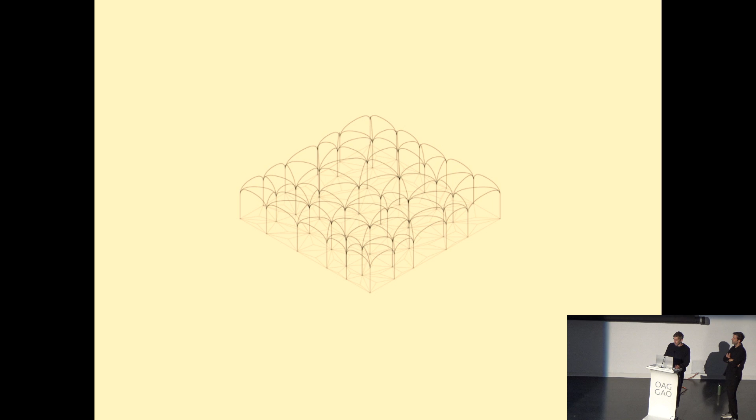It was really a very intuitive play with forms, and we generated nine different forms - I'll go through these quickly since there are tons of images and diagrams of geometry. You can see it's very abstract, often about geometry, form, repetition, and systems, but it always looks like architecture. You can recognize that it's holding up, that there's structure, rhythm, cells, and exploration of different types of structures. We did a series of booklets and exhibitions - it was really a project that occupied a lot of our first years.

In the meantime, we also were interested to build, not being only in the realms of concept, but to look at the complete opposite side, having clients, budget, context, and operating in the actual built context of Montreal. Because when you're a young architect, most of the time you don't even get to build a new house. You get to swap the kitchen for the bathroom, or just do a roof access.

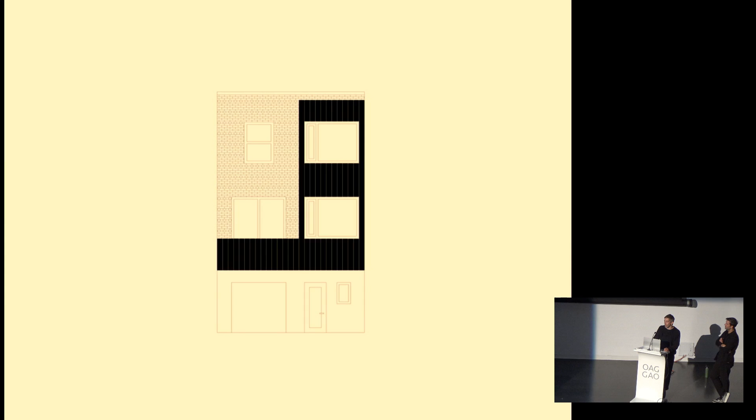Some of them were more successful, some were, when we look back, a little less enmeshed than what we'd like, or what maybe we're able to do today. But we did a lot of them, and I think it was a really interesting way to understand how to confront these idealistic concepts, working with very simple geometric forms against the actual complexity of the site.

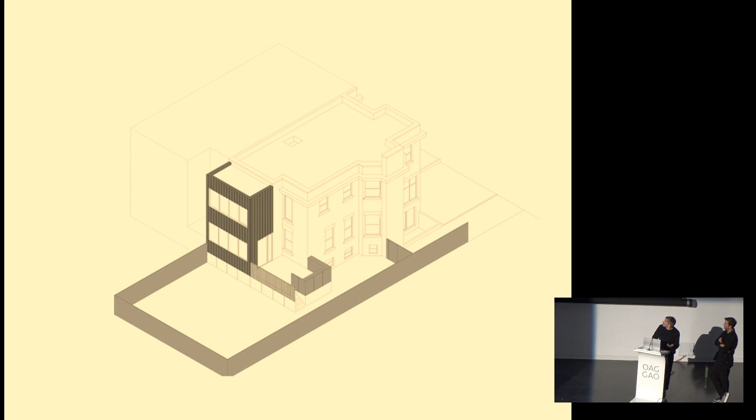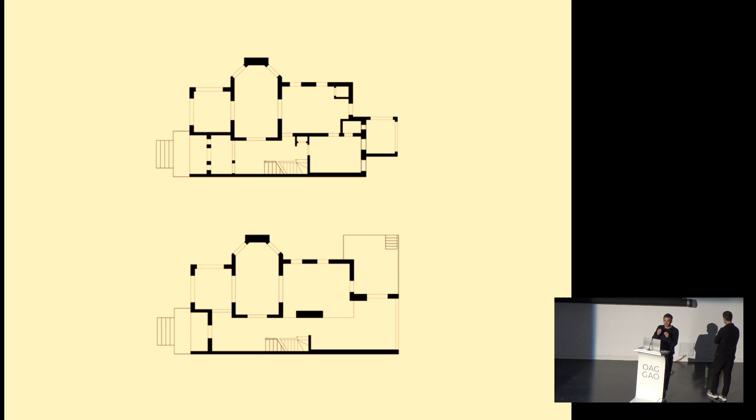For some of them I put plans because, in the end, the more we advanced, the more these pure boxes—really a family of small articulated boxes—started to get enmeshed, retaining their formal rigor but starting to really weave a relationship with the host.

Like in this project, for instance, we tried to align the windows and take some cues about the chromatic palette of the house. So experimenting with these relationships, the box with the landscape, or some kind of materiality.

So we were doing both these projects in variation and all these addition projects, dreaming of having this open field in front of us to do the absolute concepts we imagined, but also confronting this reality. I think we learned a lot about this confrontation with context.

So we recently went through the process of rebuilding our website, and it forced us to revisit our portfolio and take the time to better define our work and attitude towards building. This notion of the project existing within the tension between the autonomous concepts of architecture and the specificities of the program and the site was really a fundamental aspect to this exercise.

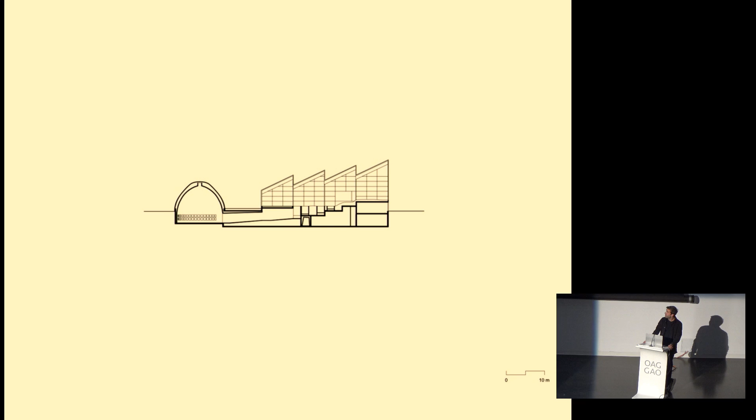It's entirely opaque and dense, a very organic form, unlike the greenhouse, which is a very technical and pragmatic form. So in the site, we wanted essentially the building to kind of disappear, but also be extremely clear.

Bold in its intent. So this is a section where we showed the sloping greenhouses, the dome, which is also a vegetated dome, essentially completely wrapped in a metal mesh, and over the years will start growing and becoming almost this kind of chia pet.

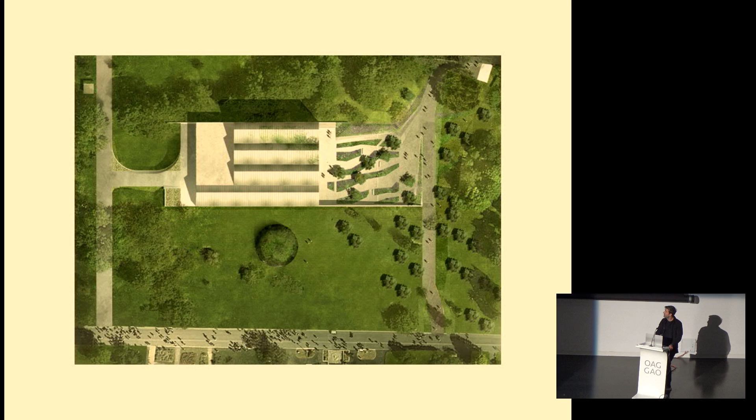We enter the museum by gradually sloping down this butterfly garden that we proposed, essentially dug into the botanical garden site, sloping down about 5 meters. The botanical garden is extremely flat, and this creates this kind of first reset where we suddenly lose contact with the horizon and become more in touch with the facades of the building.

Also note that in the sequence, the entrance to the insectarium happens here, not inside the building. The exhibition, the butterflies, depending on the season, and even the animators can be outside and greet you outside. This is also where you end your museum visit.

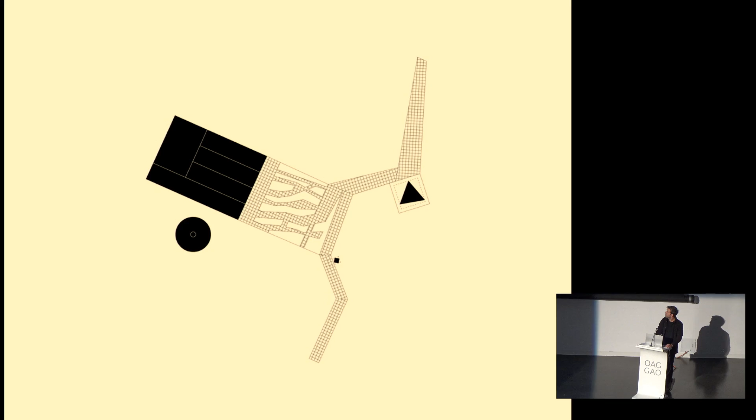And the idea for this pavilion was to create a pavilion that wasn't static, that allowed us to really move freely and guide us through the different institutions of the botanical garden. And we quickly identified the triangle, the equilateral triangle, as a form that had these qualities of being both very frontal, but also less static, than a square, for example.

So by positioning it the way we did, it allowed to be at once addressing the entrance to the botanical garden and the entrance to the insectarium, but as well the exit, because the flows of people were extremely complex in this area, because some people started their visit at one end of the botanical garden and ended it at another end. So the idea was to create something where we could naturally flow in and out of the pavilion and have it feel less like a building and more just like a hub or this kind of meeting spot.

And then we worked with a square overhanging roof to create this essentially framework for the triangle to really express itself, which also created these gathering spaces that were protected from the rain and from the snow, but essentially that really allowed to recognize the triangle as a shape.

So we can see here in plan, and inside the triangle we worked with 3 other little triangles to really define the corners and express the geometry, the pure geometry.

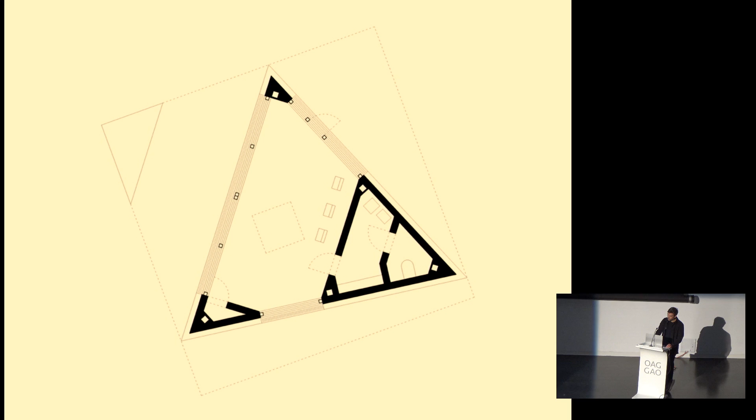The other question that we were really interested in for the pavilion at the Botanical Garden was the question of the role of the pavilion and the typology of the pavilion historically. And we were very interested in different representations of these 18th century and 19th century ruin-like pavilions to understand the relationship between nature and architecture, almost in this very romantic way. And we wanted the pavilion to be less of a building and, again, more of a shelter or a meeting point and a threshold.

The other idea that we looked at was the idea of materiality. And we quickly identified corten as this unique material that allowed the building to not be static, and to be more at one with nature and with its context, to change, to evolve.

But then we also wondered, how can we modify this material so that it's even less static, even less clear? What's interesting with corten is that it very slowly changes through the oxidization process, but it also changes with the climate, the light, and the adjacent vegetation, which can have an impact on it.

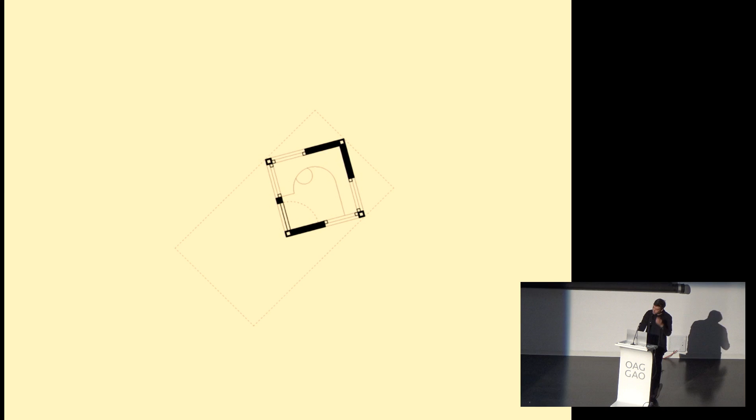So we are interested in many programs. I think we really are architects that don't want to specialize, that are actually worried about the idea that we would become specialists of any typology. When we did the insectarium, there was one magical opportunity: there was no precedent for an insectarium. I think it was really interesting, this idea that you don't have a clue what an insectarium should look like, how it's built, how it's supposed to be. So you're really left thinking first principles, and I think that's what we tried to do with the insectarium. I think you lose this when you do program after program, the same typology. The naivety of doing things for the first time is always really good. So we have a very large array of programs we are tackling, and this is something we really like.

So there was this opportunity in Quebec a few years ago. Schools were done by the same four or five firms, because every time there was a school going for bid, you had to show how many schools you'd already built, two or three, and this kind of protected gateway to public commission was really problematic.

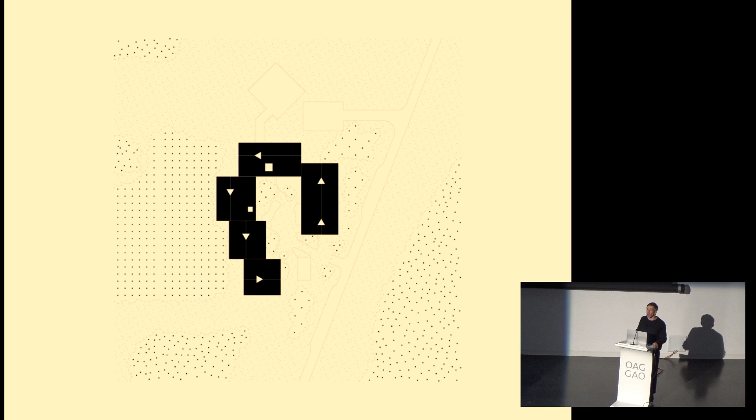This is what you see in this diagram. There's a series of pavilions, going counterclockwise from the right. There is really the small kids pavilion with the kindergarten and first cycle. Then there is a common pavilion on top with the cafeteria, the large area where the groups can be addressed, and the school administration. Then the third pavilion counterclockwise is the gymnasium, and then cycles 2 and 3.

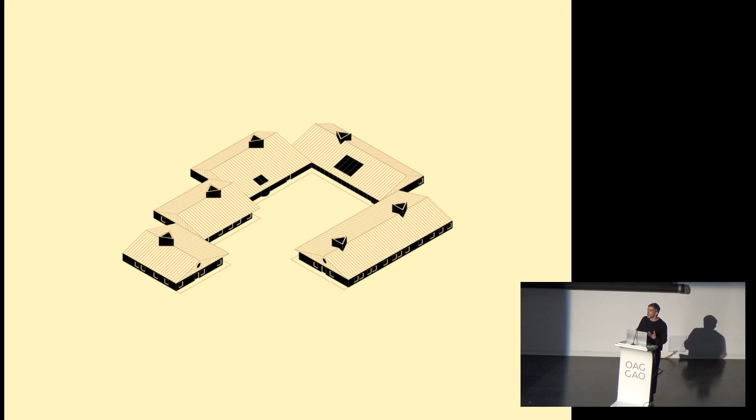We've organized these functions in a kind of group form, but at the same time, just like the insectarium where we had this kind of heterogeneous program, it was important for us to group them in a formal system that would not make just a collection of objects, but a variation on one theme. So the form is very articulated, but it's also a repetition of the same kind of form, something we had explored a few years prior.

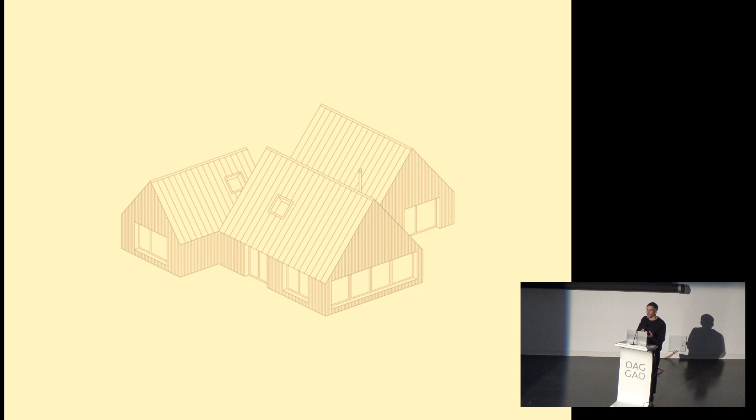With this small house out in the country, the brief was about families that were recomposed, so there was the house of the kids, the house of the parents, and the common house. The brief was really interesting in the sense that there was 3 houses, so we literally did 3 houses, but again it was the same form, same proportions, articulated, rotated, expressed in space, creating this kind of complex organization internally, but still creating this coherence that is really important for us.

So you see a little bit what I've talked about. Even if the gym is something completely different in terms of height and scale, it has more or less the same expression as the other pavilions, and we achieve that by sinking the gym one floor down.

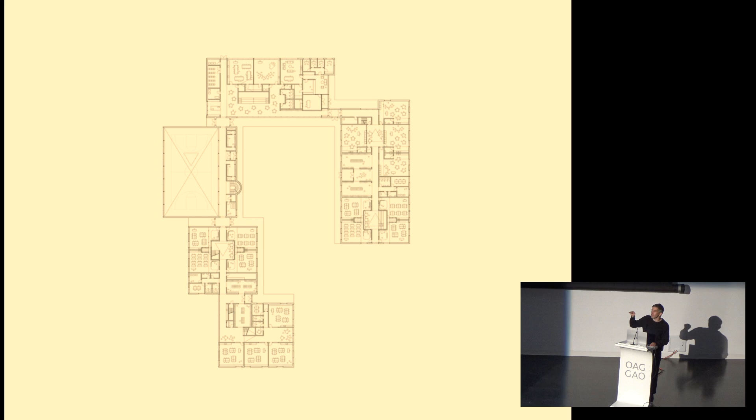So when the kids cross the gym to go to the cafeteria, for instance, that is on top, they can see the other kids play one story below. Just this move was allowing us to keep this uniformity, this kind of horizontality that you see there. So the gym is not 2 floors while the rest is 1 floor.

I think this is an important thing, where the relationship with the program is used to articulate and generate the rules of the organization of the school. But at the same time, the formal system is also very important to keep coherent, and in that way, the sinking of the gym was a really important gesture for us.

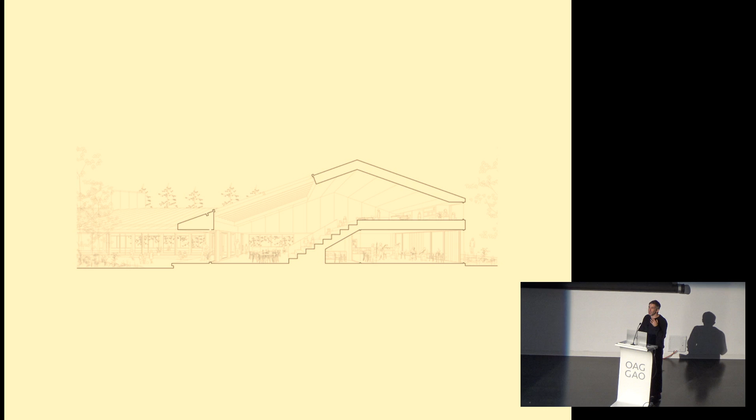So you see some of the sections we did at the time of the competition, trying to use this space, because in terms of context, there was a lot of agrarian building, pitch roof building, large kind of agrarian buildings in the area. So we also worked with this idea of the archetype.

That's another constant in our work, and the question then was how we can use the archetype of the pitch roof, how we can use it spatially, as we'll see in a few moments in the image. Very beautiful context with Mont Shepherd - and I didn't say it when we had the plan - but basically the courtyard is opened, exactly calibrated to frame the top of the Mount Shepherd from the courtyard. So it becomes part of the architecture that is outside, looking for parameters to organize this courtyard. The view was one that regulated the formal system.

So this is the entrance, and you will see these kind of large chimneys that are also a reference to vernacular buildings around. But these are light wells that bring light into each group of 4 classrooms.

We'll see the interior - this is a very low building. The context was very horizontal outside the Mount Shepherd, which is kind of an accident in the landscape. Everything around is very, very flat, very horizontal. So we thought the building should just hang low in the landscape and let the mountain express itself as much as we can.

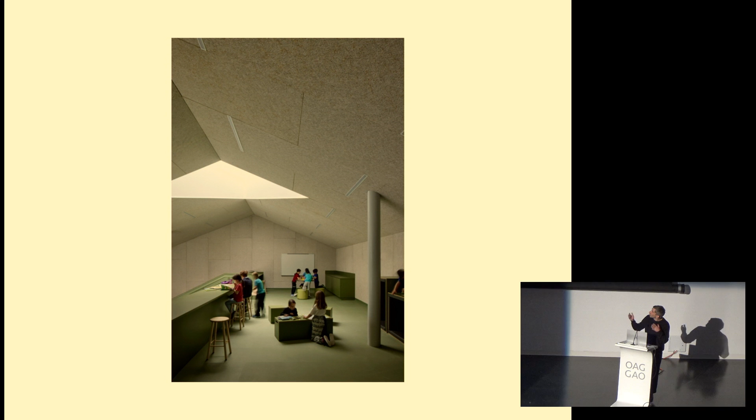So different pavilion, different kind of mezzanine, but every pavilion has a little bleacher and a mezzanine to go and read a book on a beanbag under the roof. This is the main bleacher, where all the kids gather. Again, the same kind of typology, very open onto the courtyard. You can actually open large sliding doors and go inside and outside, and on the top there is this little space.

Relationship to the forest, and the view — this is at the end of one of the mezzanines. There's this oculus on the pitched roof that frames Mount Shepherd.

Of course, we like to do museums. We like tackling different programs, but we really like the museum also as a public space and a space of reflection. So we did this competition, the last competition, and we are now doing the permanent exhibition in the building where we lost the competition, but we just thought we'd put our ego aside and do the exhibition. It was still a nice project to do, but we wanted to show you the competition entry.

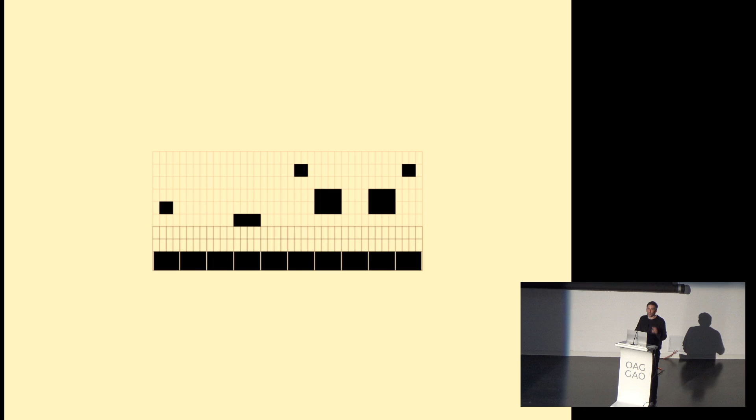It was an open competition, first phase international open competition, with 4 finalists. Again, we were trying to find what was the figure that would be instantly recognizable, I wouldn't say a symbol, but a form for the museum. We wanted to anchor this in one programmatic element, and that is the garden.

There was one element of the program that was really important in the brief: it was going to be a garden. I think in the brief it was intended as a garden that you access after entering the building and having your ticket paid, more like a controlled private garden. But we thought it would be really interesting to actually put it in relationship to the city, as a shared space.

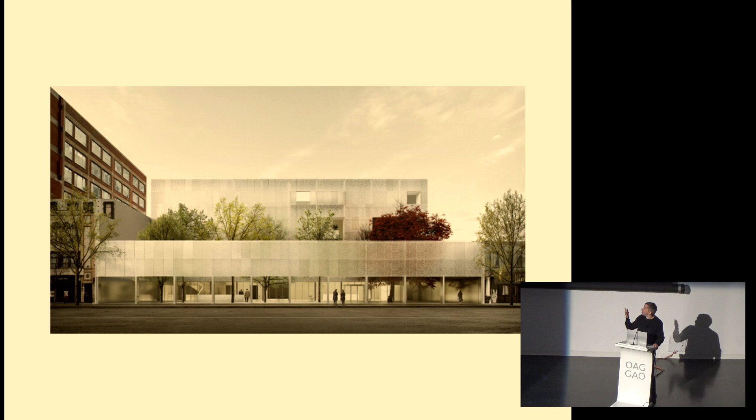So the front of the museum would be this gift to the city, or this place where communities can meet, and have people who are totally uninterested in visiting the Holocaust Museum still come to spend time in the garden or grab a coffee. And hopefully there would be meetings and encounters, or celebrations from the Jewish community using this garden, but in a much more public way.

So we wanted to both address the street and take a step back for the museum, creating this buffer space between the city, the street, the sidewalk, and the museum. And we had this whole idea of thresholds, because going to see an exhibition on the Holocaust, you need to pass some threshold and prepare yourself for what you're going to see. We really saw this as a series of thresholds that you were crossing.

So it was calling for a series of screens. I'll talk about the materiality a little later, but you see it in sections - it wasn't really an articulated form. It was really the figures of the screen, the flat 2D screens and thresholds that you cross to get into the exhibition. So you see it like from the street.

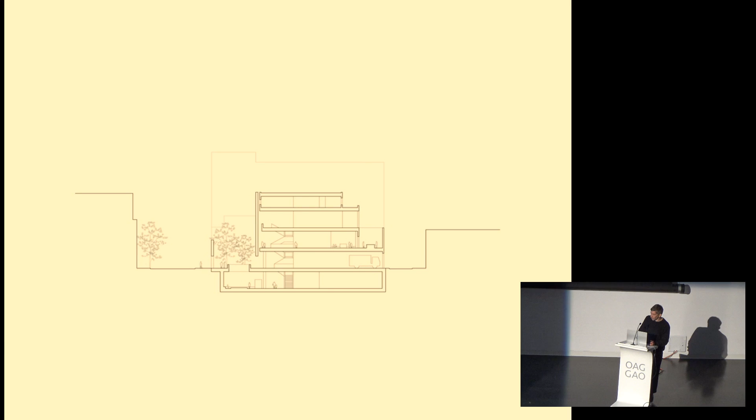There's this elevated part of the facade that is as high as the buildings on each side, which are 2-story buildings - and there used to be 2-story buildings there. So there was a relationship with the context, and then set back behind this kind of green screen of greenery participating in this layering, you would have the screen of the building. So you see in context this idea that we shifted the museum back, not putting it in front as an imposing, strong monumental statement on the street, but with a little setback.

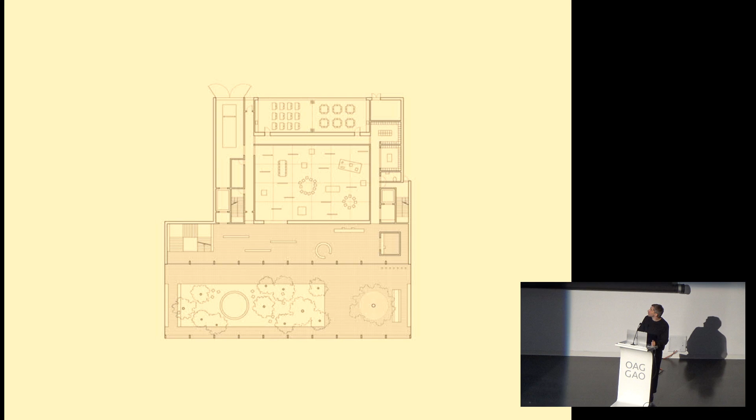So you see the garden, the hall, and then the exhibition space behind. This is really a project that is layered from the front to the back.

And when we're talking about this screen, we were interested in creating a kind of intentionality with it, because they would be so minimal that they had to add this kind of intense materiality to create something interesting in the city, playing with light. And we looked at this memorial from Louis Kahn, an unbuilt memorial for the 6 million murdered Jews.

It was like a series of spaces created with glass blocks. And he had this whole discussion about light - not using heavy concrete, for instance, to symbolize the weight of history, but creating an interplay of light and shadow, because you can always see this event as a relationship between light and dark, hope and despair. So it was a really important precedent.

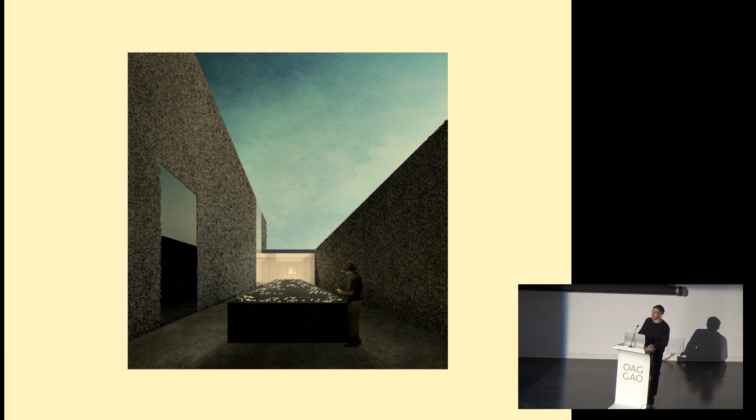And so we have this plane, as we talked about earlier, as this buffer zone between the exhibition space and the exterior, and the memorial garden in the back. So again, in this section, there is this long monolith onto which you put a stone before leaving the exhibition.

Another project that we recently won two years ago following an international competition in Montreal, called PHI Contemporary. There's an existing institution in Montreal called PHI Center, which launched this competition to bring together in one place all the diffusion spaces, the exhibition spaces and presentation spaces related to PHI.

So both visual arts, but also music and performance art. What was extremely particular about this brief in this competition was the extremely complex site and existing buildings on the site.

It's in Old Montreal, essentially located in one of the oldest first settlements of the city, at the intersection of Rue Saint-Paul and Rue Bonsecours, next to La Chapelle Bon Secours et le Marché Bon Secours. The little house we see on the right is located exactly on the footprint of the first house that was built in Montreal.

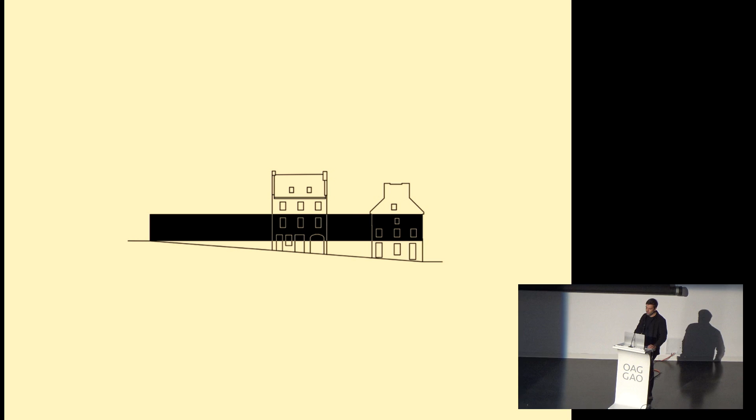And so we can see here this horizontal band and how it comes together in built form. The idea here was to really create this plateau, this new plane that served both as a reference point for the museum. It contained the art spaces, but it also offered a very unique reading of the existing structures - again not trying to add to them, but really trying to frame them and hold them together, by adding also a series of public spaces.

So here we can see on the left, we're at grade with the streets, whereas the plateau kind of hovers above the street level and creates this new entrance along Rue Bonsecours.

We can also see that on top of the plateau, there's a vegetated garden space where the public is invited to come, whether it be through the museum or independently, within the framework of the museum hours and programming. So there was also this idea of the vitrine.

How can we create something that's in a way almost a vitrine and a showcase of the artists, and not this precious box or piece of architecture that people go into to see another precious art piece or another artist.

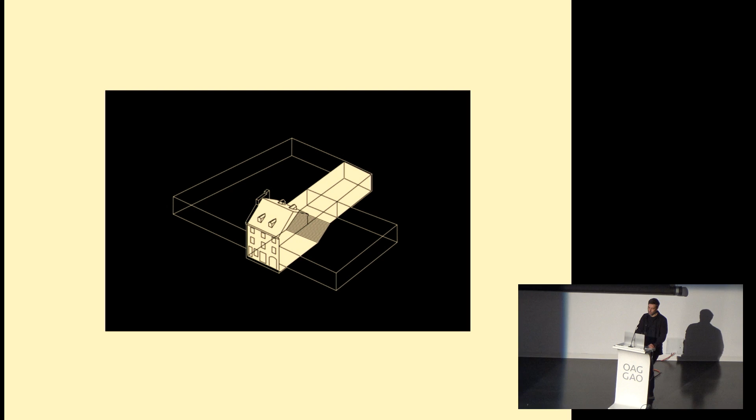They were workshops, stables for a long time, back of houses for shops and for houses, carriage houses, and they evolved and changed. Even sometimes they were used by the neighboring buildings and not by the buildings on our site. And so these rear courtyards were extremely important, and we wanted to create this almost—I'm going to go to this side.

This almost undifferentiated parcours through the site, which echoed this history of these rear courtyards and annex buildings. So again, Hubert used the word earlier, extremely complex, and we see this as being a very positive thing.

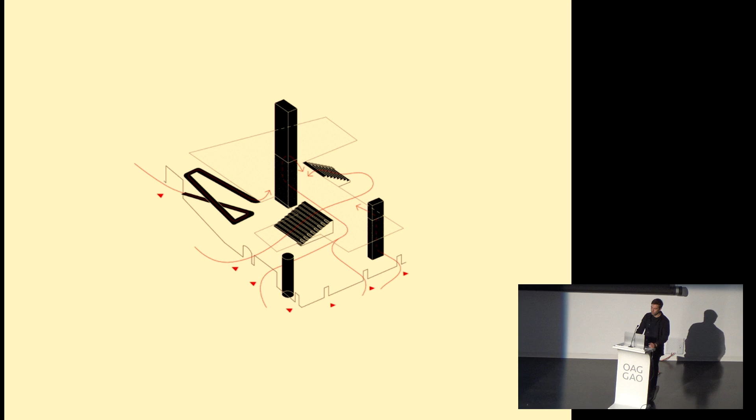To have these surprising, often somewhat confusing, but full of variety and full of personality projects that essentially can't be summed up by one thing, but also which can be read in a very coherent and homogeneous way, and can be understood in an abstract way with often this single gesture.

So here we see somewhat of an impossible view from the back end of the site, where we show kind of all the features, where we can see the courtyard, the existing courtyard on the bottom with the art piece.

We can see the auditorium, which also acts, when it's not used in auditorium setting, as a gathering space, but also a circulation space, the education space adjacent to it, and the direct access to the rooftop terrace.

And then back into the building through this greenhouse structure above one of the existing buildings whose roof had been destroyed maybe 50 years ago, and which we're proposing to rebuild as more of a mono-pitched, or single-pitched, greenhouse structure.

The project is very much in motion, and we're deep in the planning phase right now, starting to move towards permitting. So a lot of this has already evolved, but the main aspects of the project are still very much intact.

So the plateau—this is extremely important in our approach—is to really believe in these strong concepts, and to really push their feasibility in a way, and to go to the kind of extreme.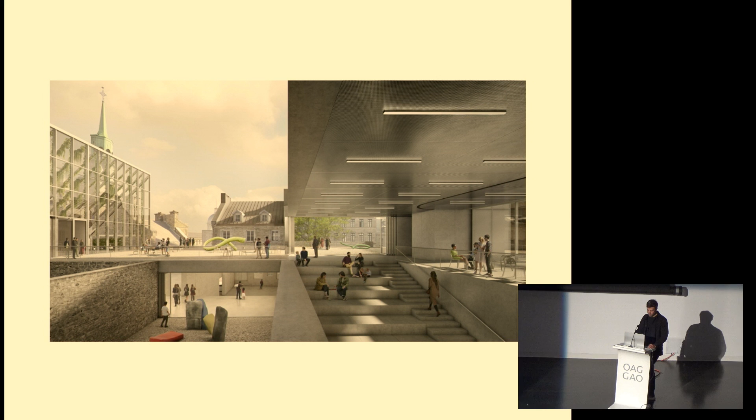But also a great space and place for citizens to see the city in a different way.

So in this case, being almost in the roofscape of Old Montreal is a quite unique feature, especially on such an expansive terrace. And you know, I could go on, but I think we've already talked quite a bit.

A lot of work was done regarding the materiality of the project, working with natural stone and stabilized earth for the roof, and using very specific types of trees and vegetation, to arrive at this still very pure reading of the original concept as this horizontal plateau.

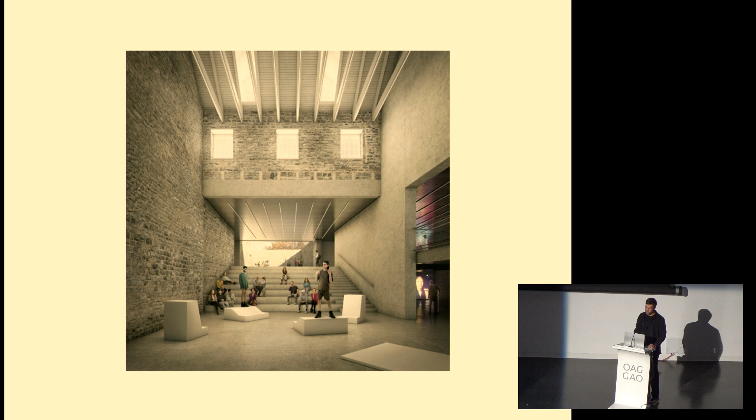Quick view inside the original house, Maison Vigée, where we can really see the connections with the existing houses on the right, and where we can see all the historical traces of the buildings and how they were transformed over time.

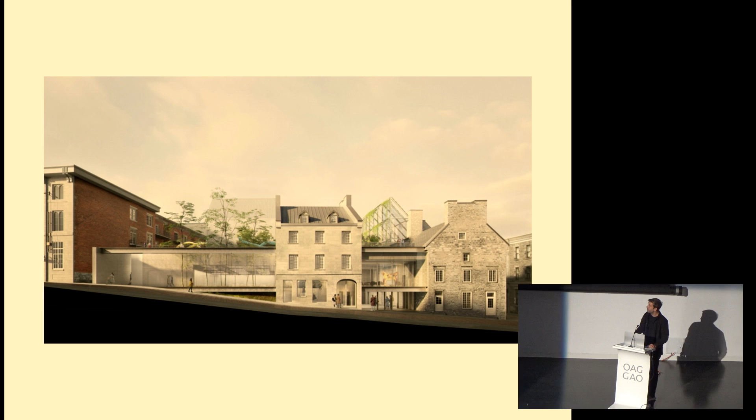Maybe just a quick note about this view that I already showed. This is the new iteration of it, which shows how similar it is, but with a few modifications, where we amplified this notion of transparency in the vitrine and this invitation inside.

One thing we want to mention about this view is that we live in a world where we are capable of doing such real representation of projects that sometimes we forget to come back to this abstract view. And while this is a very photorealistic render, this is a completely impossible view.

When we did the competition and were working with our partners, a lot of people told us it was a bad idea to show an image of a building where we're essentially a block behind the neighboring building. We're not, this is a view we will never have, but we felt it was important to keep this object-like or model-like reading of the project so we can keep using our imagination. In these lectures we don't have a chance to really dive into our work method, but this is also why we love models so much.

For this project, we worked with a physical model way before we did any renders, about 3 meters long by 2 meters wide. It was really like a train model, and this is very similar to that. It's a view where you are capable of really working together. What we like about these models is that everybody can gather around and have a discussion, and it's not just one person with the computer holding the mouse.

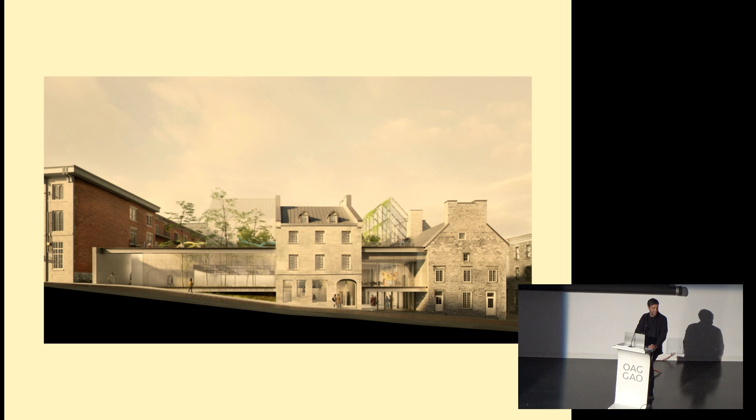Hi, Buzzy. Yeah, we've got to speed up.

Very quickly, this is a small project so we should be able to go through it fast. This is a house in the Laurentians outside Montreal, very close by. The brief was very simple: they wanted a cabin or a house, not quite a house, more of a cabin in the trees.

The land already had many mostly mid-century, but modern structures, each one very simple and yet bold and recognizable. The clients asked us to come up with a new version of these small houses on a site that was extremely pitched, over a 30 degree slope, which was perfect for a house in the trees.

We were also confronted with very specific bylaws, the main one being that we couldn't build on stilts. So how do you do a house in the trees when you can't really go up, without having a massive footprint? We worked really hard with the bylaws to come up with the most simple structure that could be easy to use and easy to live in, but which could help us live inside the trees. So what we did is we cantilevered a 9-square grid box on this very small concrete plinth.

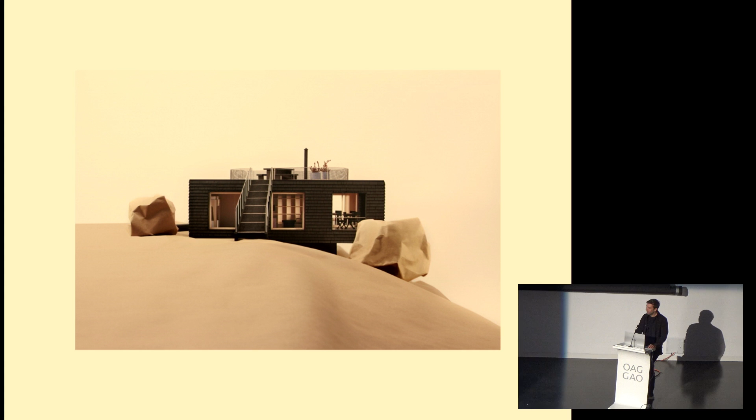Then we applied this very simple 9-square grid and regular grid of windows, 9 cells, other than the entrance side which is very opaque. I'll come back to the ramp in a second. To create a house, and as we can see in this plan, not every room deserves the same size, it was an exercise in finding the limits of where using such a rigid grid becomes more of an opportunity than a constraint.

It turned out to be quite interesting and not that hard. Everything from the terrace, the screened-in porch on the left, everything fit into the system without too much effort. So it's a three-room house, with a room in the basement.

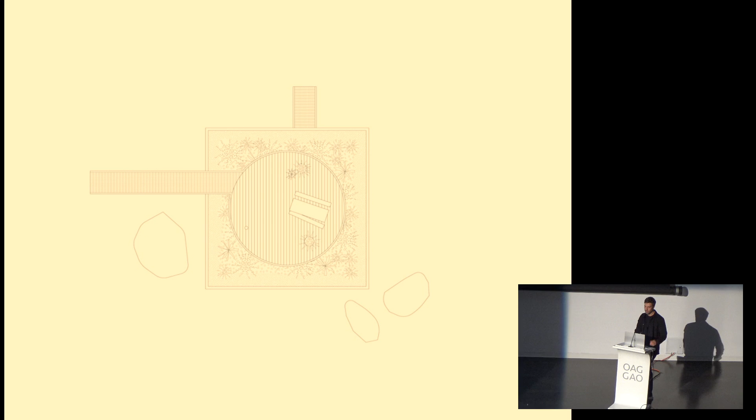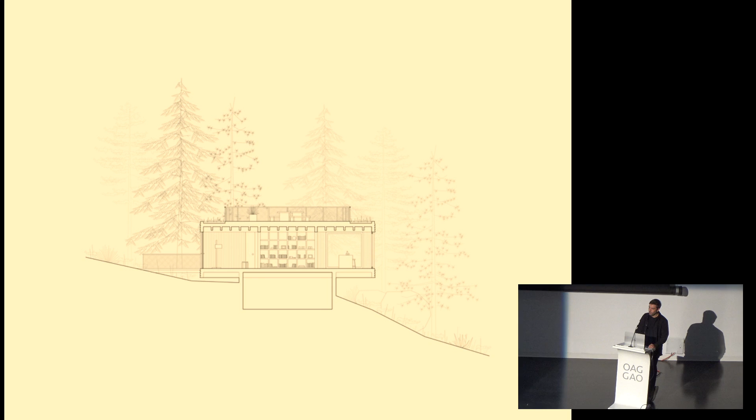And on the roof, to be even more in the trees, we're offering this large deck with a passerelle that reaches up to it, so on all 4 sides the house kind of floats in its setting. It's a similar diagram to Phi, but it's not historical buildings we're trying to frame here, it's more the nature in which the house is set.

Each side offers a very different view and angle, yet with a completely homogeneous facade system. A little glimpse of the structure, which is essentially a very simple steel structure at the plateau, then fully wood above it. We see the concrete plinth, the steel structure overhang, and above it a full wood structure, not an ounce of steel, no aluminum, nothing. It's 100% wood, mass timber, and shingles. So again, pushing this idea of going all out with one material, one expression, no exceptions, and a very clear reading.

So instead of showing renders, we're showing very fresh, recent photographs of the site.

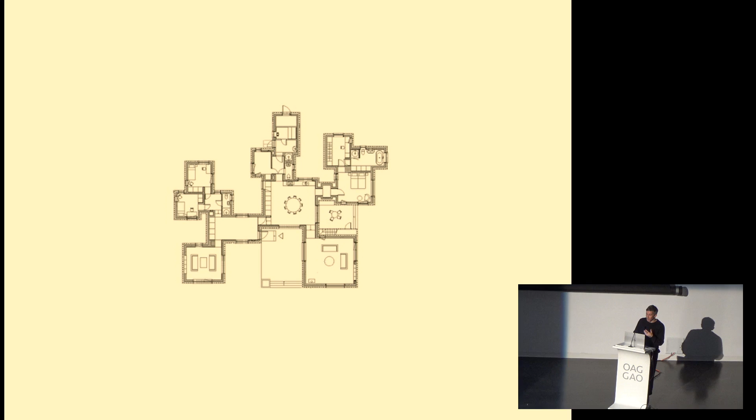Last project, two minutes. I was intended to talk a bit more but I can do it in 30 seconds. We've been doing houses for a really long time, collecting plans we're interested in that have special quality, so it became a project through time. We don't have a name yet, even though we've been working on it for a very long time. We called it, effectively, with affection, the Perfect Plan.

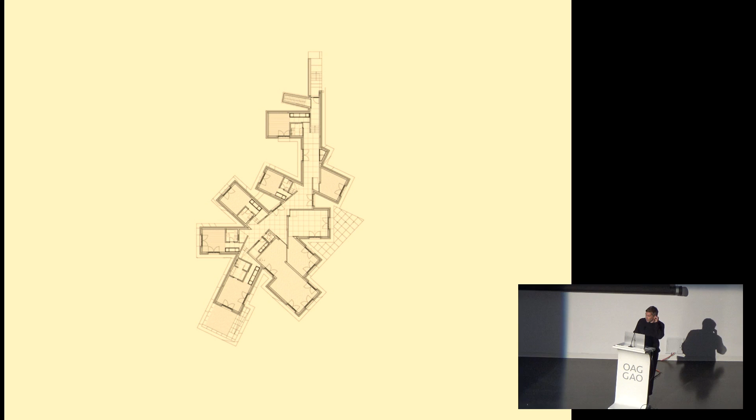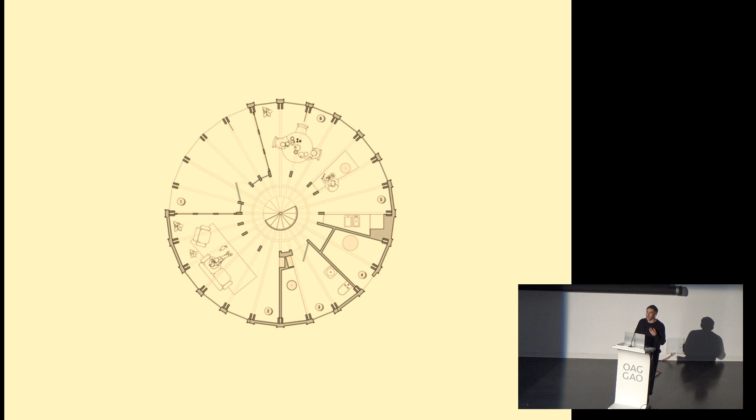It's a collection of different kinds of plans of single family houses we've assembled through time. Each one has a very special formal quality, the qualities we've been talking about, like confronting this kind of idealized form or structure or organization with the program of a single family house. So we've spent a lot of time analyzing, classifying, and understanding them. It becomes this kind of repertoire of different typologies.

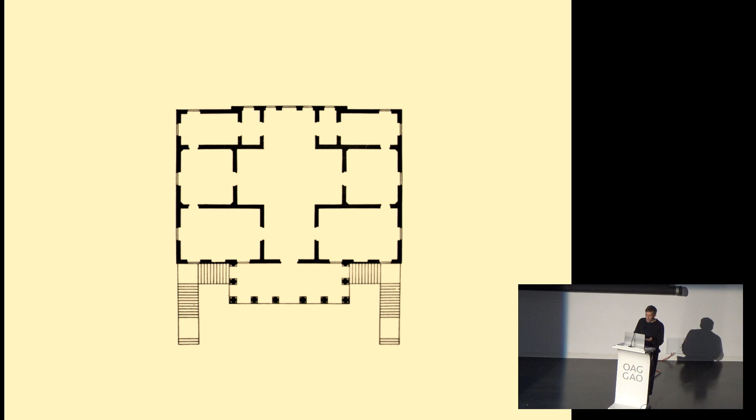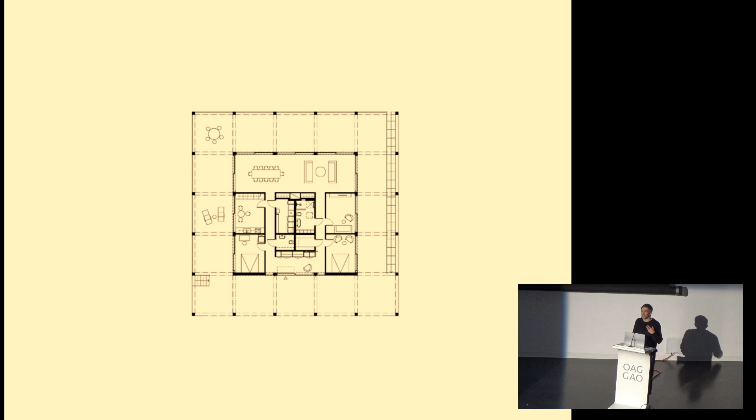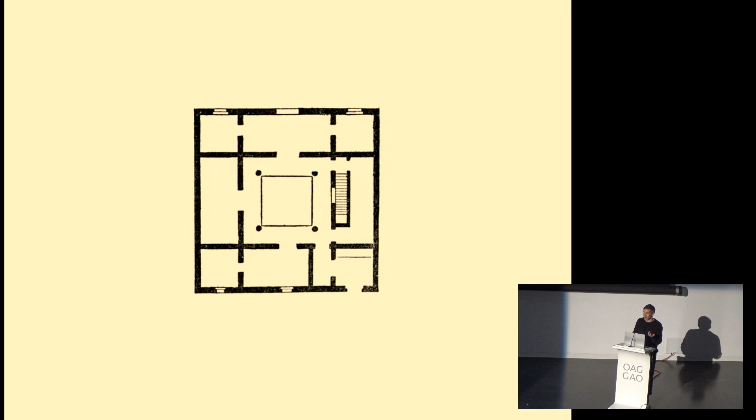I'm going fast, but we'll come back to this. Because we just presented the 9-square grid plan, that goes really deep into the history of architecture, back all the way to Palladio. Our work starts from the site, the constraint, the program, then goes back into this conceptual realm, digging into the material of geometry, history, and references, things that are really important to us.

This is about the negotiation between these two ends of the spectrum, and I hope this feedback loops into the project we just presented, very abstract research, but somehow it feeds our practice. I hope you enjoyed this little presentation, and we're going to open to questions now.